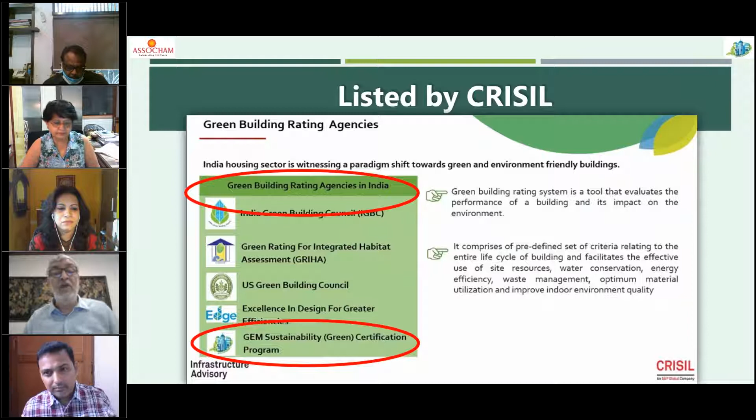Friends, we have currently certified varieties of projects, which includes Abbott as a pharmaceutical project, Hilton hotel chain, ITC chain, several universities as part of our certification program, and also large airports and railway stations.

To our certified projects, we ultimately give this nice plaque and certificate, which I am very happy that the directors and organizations are taking pride to put into their front lobbies or the director's cabin.

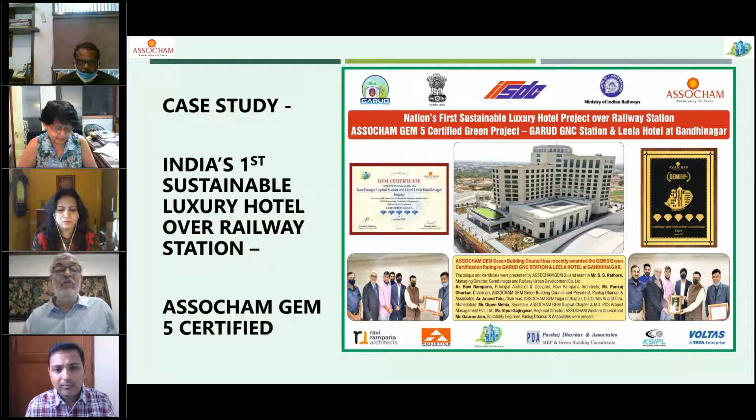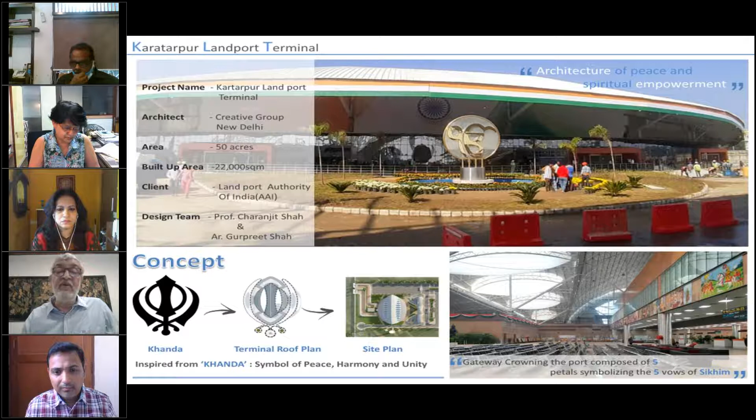Also, the very important Kartarpur Landport Terminal, which is very unique, as all of you would have known, got GEM certified. The Chennai airport got GEM certified, and also the Baroda airport. And this project in Noida, which is an IT and ITES related project, also got GEM certified.

Our main mission has been to reach you, my students, my future generation, who are extremely important to us. We know that architects and engineers who practice green and sustainability are going to really change the world, and India specifically. With that mission, we started Mission 100, and currently we have 70 plus universities and engineering colleges partnering with GEM certification.

We have now 800 plus GEM certified professionals, and today is a fascinating day for GEM because we have 1500 registrations. And friends, if you want to take real advantage of this COVID time, you definitely could, and our exam is transparent.

You can use your books and do that from home. And of course, our team is going to tell more about it, but be GEM certified and have that kind of, I would say, pride attached to your professional achievements, which will happen.

Friends, during this pandemic, we created several interesting programs, including one important mission with the Bureau of Energy Efficiency, BEE, where we are talking about how to make current buildings more green, and how to change those technologies without owners' money. This is what we are driving with the help of World Bank and Bureau of Energy Efficiency.

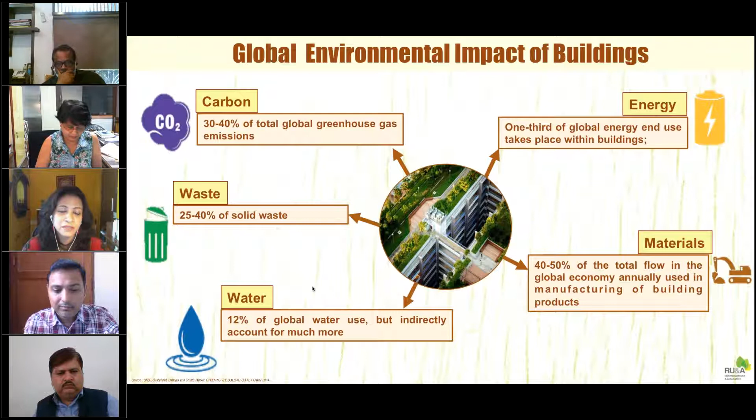When it comes to buildings, they are today the biggest emitters of carbon dioxide, mainly because of the operational energy used throughout their lifetime. Of course, energy use also goes into the embodied energy of materials. In addition, we consume about 50% of materials used throughout the entire globe, and the water consumption and waste we generate have all been recognized as issues, which is why we are focusing on how to make buildings less impactful to the environment.

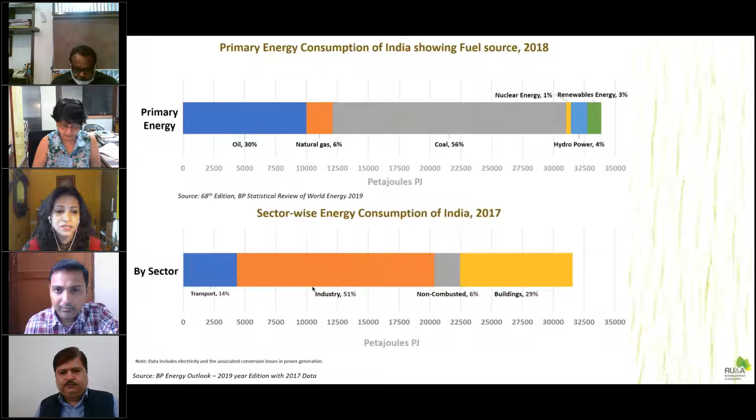Just to show you, in India alone we still use a lot of coal, which is a fossil fuel based energy that causes the emission of carbon dioxide. In the second graph below, you can see buildings contribute to 29% of this whole energy consumption. So our job is to plug the fossil fuels by reducing energy consumption, both embodied as well as operational.

When we talk about materials, we generally don't see what goes behind them. A lot of materials being used are somehow deforesting and denuding the earth, and therefore we are losing our carbon sinks, the forests, and the oceans which are our biggest carbon sinks today. Apart from the denudation, the process itself of making materials is also of concern because it takes huge amounts of energy and emits a lot of pollution.

A new thing, not so new, maybe 50 years old, is the whole concept of sick building syndrome. In the process of making our buildings comfortable and clean, we have also made them sick. In today's world, where we are talking about COVID and a pandemic like this, we do want to ensure our buildings have a good indoor environment quality. This is also one of the reasons why we look at green buildings.

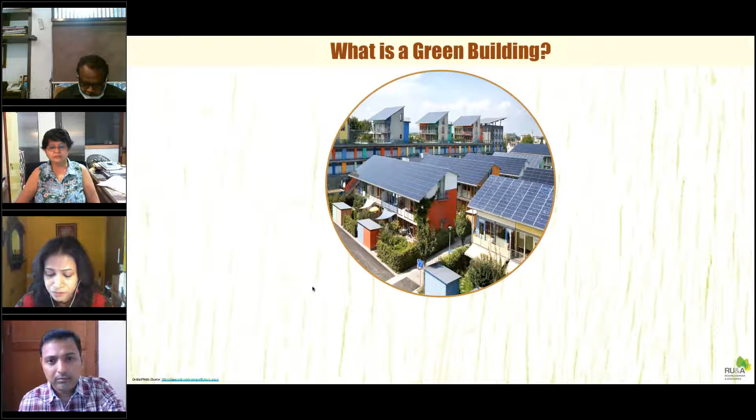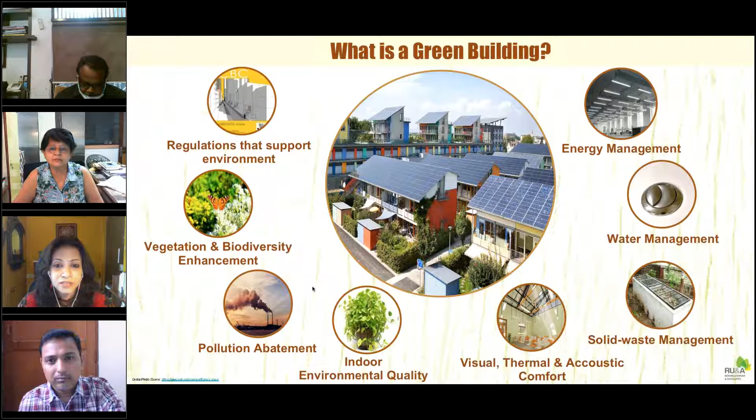To summarize green buildings, we have all these aspects: energy, water, waste, looking at the thermal, visual and acoustic comfort of occupants, providing good indoor air quality, abatement of pollution, enhancing vegetation and biodiversity, and of course following all regulations and standards. Here, fire safety standards are a very unique feature of GEM, which I would say is not considered in any other green rating systems. So it makes a hell lot of difference.

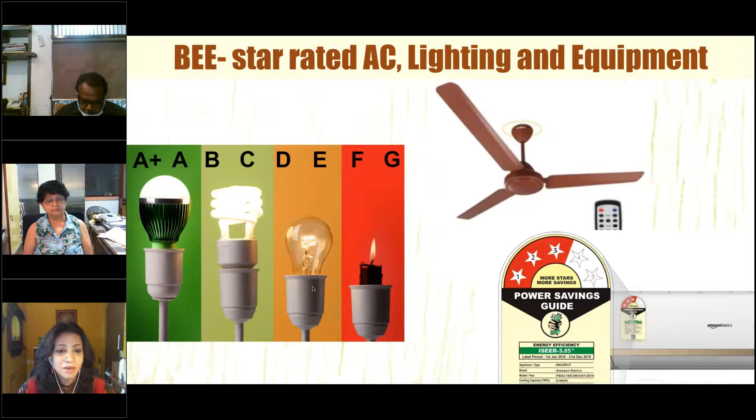In energy management, I won't go into too many details, but there are three things: passive, active, and renewable energy. Passive is the building itself, active is all the equipment, and then we have renewable energy. We have a huge body of knowledge in our passive structures in India, and from there we take inspiration for the passive aspect of the building. When it comes to active components, we have all the BEE rated appliances today, which have a potential of reducing energy consumption between 40 to 60%.

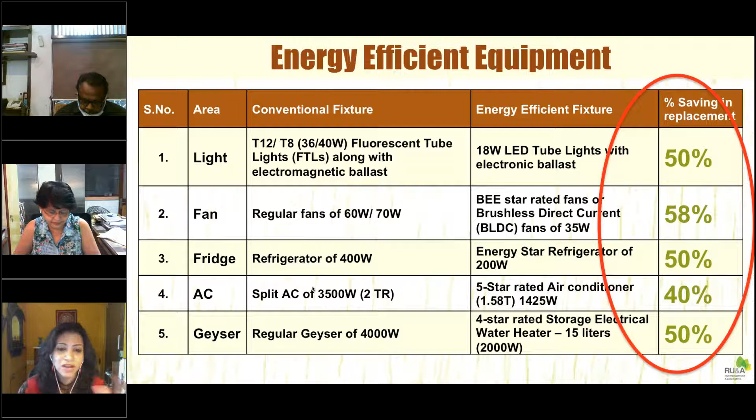So we have a huge way to reduce our energy consumption by using efficient equipment. As a country, we have potential for solar and other renewable energy, but solar has huge potential. We always think it's impossible to use solar in places like Mumbai with all the tall buildings, but here's an example of a housing society in Mumbai, 20 stories high with 4 buildings, that has been able to put about 800 kilowatt hours of solar panels on top of the building.

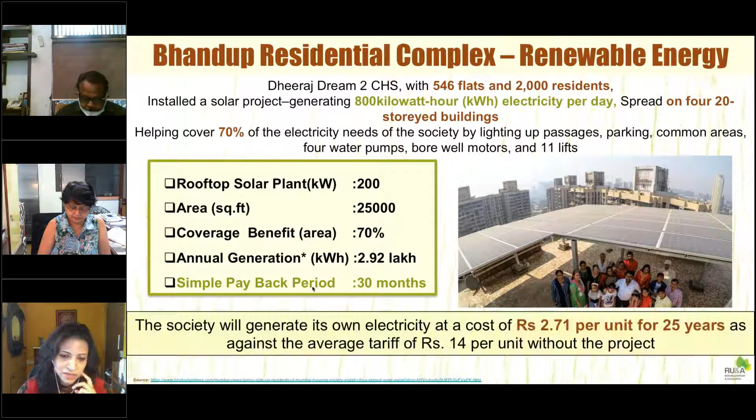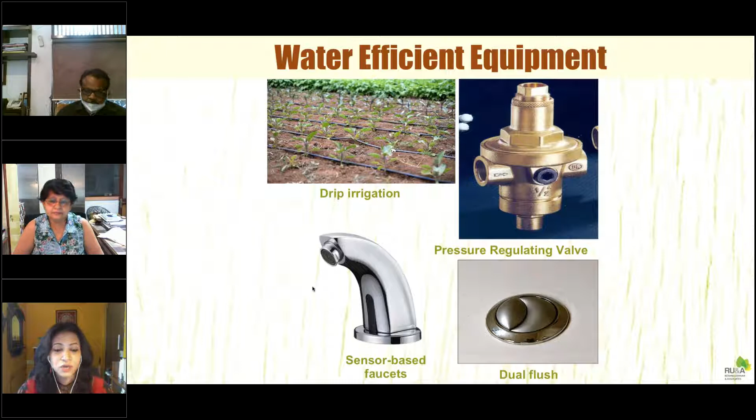When it comes to water efficiency, especially in urban areas where we're not very careful about water use, we can use drip irrigation and efficient equipment to use less water, and of course recycle water. We recently had a seminar on water where we learned that almost 90% of wastewater in Israel is recycled and used back into agriculture. These wastewater treatment plants look like gardens, but they don't use much energy, just plants to recycle water. We can do this as well.

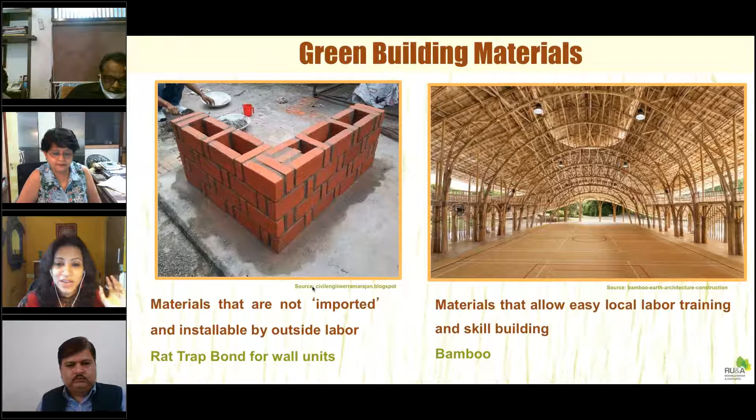For materials, we need to think of using materials which are not going to harm the environment in the long run - biodegradable, as few as possible, local materials, and so on.

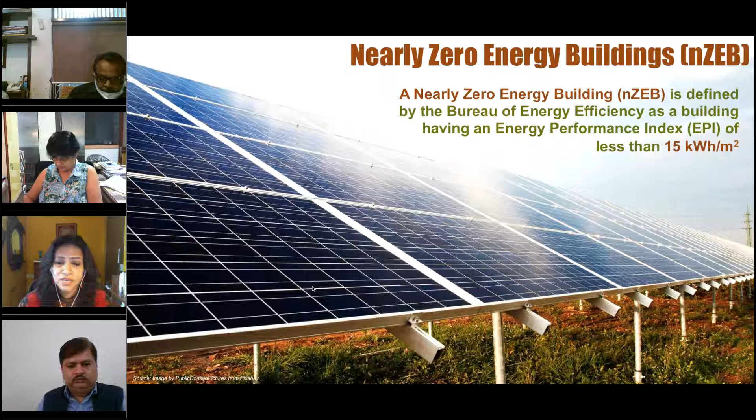The new direction we're moving towards is net zero and nearly zero, not just related to energy. The Bureau of Energy Efficiency has a definition for nearly zero energy buildings, but we're looking at net zero in almost everything - water, waste, and everything. We already have a wonderful example here in India: the Paryavaran Bhavan, which is a net zero energy positive building, giving energy back into the grid.

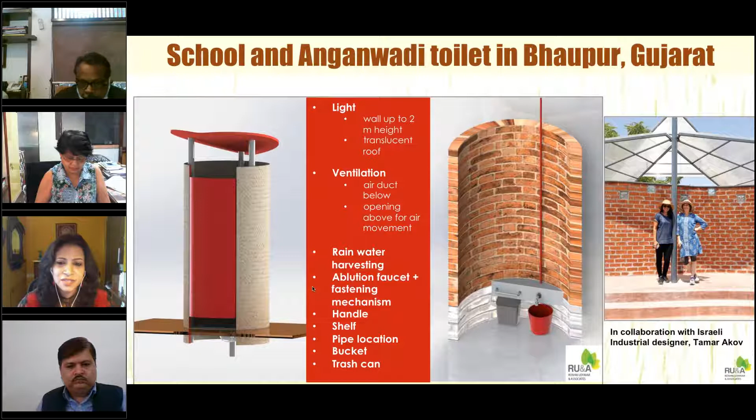I wanted to share one example of a toilet project I did with another Israeli designer, Tamar Akov, in Gujarat. The whole process was designed with children themselves - how to use the materials, what kind of shape and design - and we tried to make it as sustainable as possible.

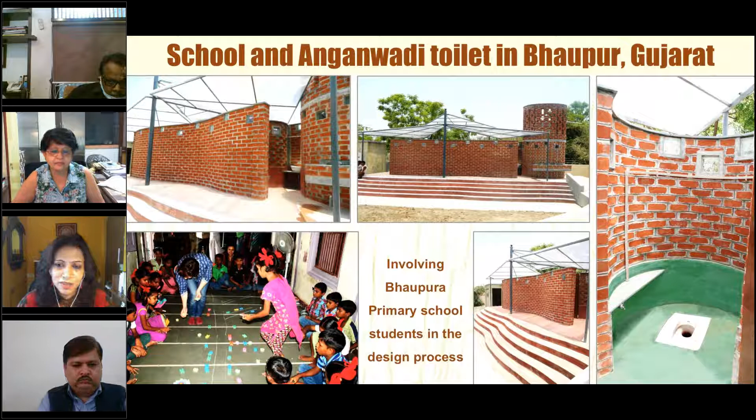Retrofitting also has great potential, and I won't take much time on this. The best example of retrofit is the Empire State Building, where among other things, they changed 6,500 windows and made it energy efficient. In the process, about 38% of the building's energy consumption was reduced.

There are examples at even larger scale, like the Masdar Eco City in Abu Dhabi, or if you look at communities, we have Freiburg, Auroville, and various other examples all over the world of communities that have gone green.

Lastly, I'd like to quote from H. Kumar Vyas's book on design: when we are designing buildings, cities and communities, we always look at design as an agent of change to enhance and improve our material, psychological, and socio-cultural environments. That's it from me. Thank you so much, and I wish you all the very best in the exams as well as in becoming a professional.

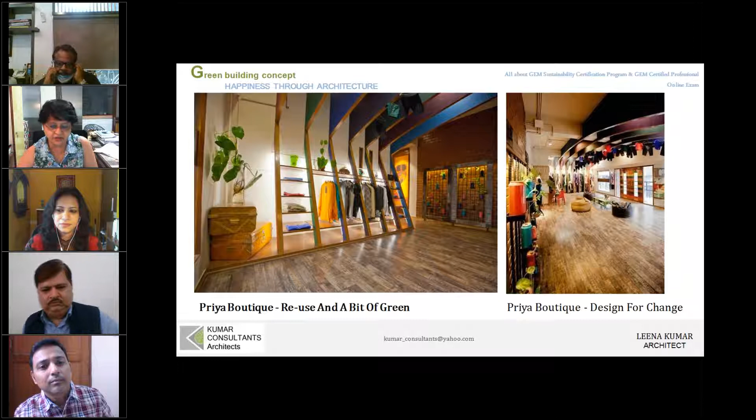A bit of reuse and a little bit of green, which is really the biophilia hypothesis, which says humans have a very innate connection to nature. And just a touch of it changes the whole impact of a space.

When we are designing, what I'm speaking of are really ideas of a green concept that are perhaps not so technical, but very important in creating an atmosphere of being positive.

This is a very small residence, which is 22 feet by 60 feet, and in the middle of it all is a skylight. When we have spaces that can be used, can be decorated, when you have reasons or occasions to celebrate, that's an important aspect of design that really goes a long way to creating positive energies.

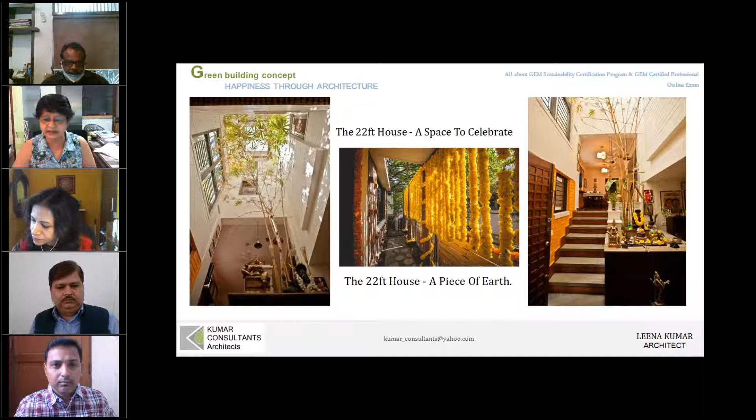It's about sunlight, it's about green, it's about spaces that lend themselves to being easily celebrated. And we as a people celebrate many occasions, many festivals, family gatherings, and that aspect of design is quite important.

This is another one which says it's about wealth and local sensibilities. Our country is very variable, we have from the rich to the poor. And when we do designs for the wealthy who can afford it, it's always a good idea to use local talent, of which we have plenty.

Because if we have 136 crore population, more than that, each one has a part to play in order to be a happy nation. Part of the whole idea of being green, part of what GEM calls a green and eco-friendly movement, is involving all of our population. Each one of us has something to contribute, and using local talent, of which we have plenty, is one aspect of it.

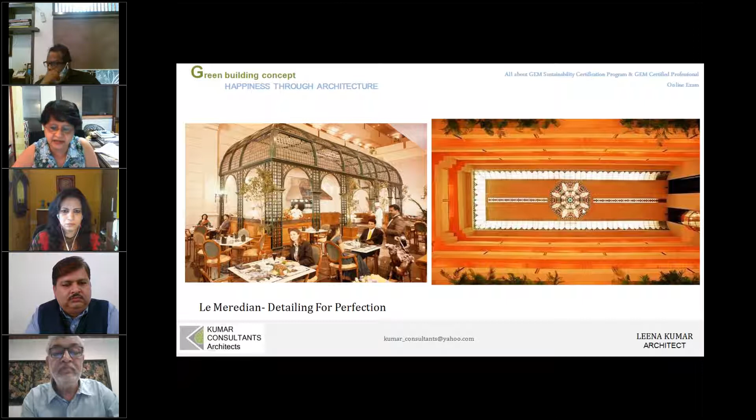Anything that we do, when there is effort into detailing, when there's an idea into creating perfection, then a lot comes from that also. These are all aspects of creating buildings and interiors that, in a way, contribute to the whole idea of a green building, because there are as many aspects to it. We have 136 crore people, and 136 crore ideas that come in, and everyone really has a part to it. So apart from the technical aspects which I'm sure you'll be going through this afternoon, I thought I wouldn't touch upon that - these are the other softer sides that go a long way into making buildings green and happy.

This is again about design, about catering to what we as a people like, what we are used to. This is an exhibition for carpets - so instead of just hanging carpets and having people see them, we created forms. We thought when anyone comes, apart from just seeing the carpet, the whole display becomes a very pleasing experience for anyone who comes and sees. It was a great success, and we had many people coming in just to see the forms, the shapes, and the carpets.

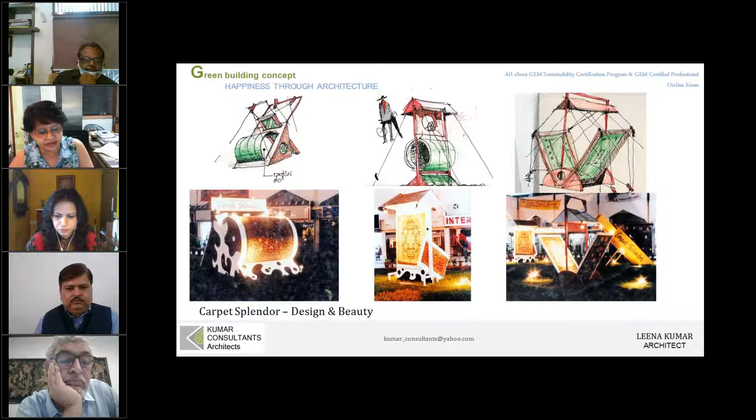When you design, even in a simple thing like a carpet exhibition, the design lends itself to the community coming together to relate to the designs that are there. That's all part of community building.

This is the last one I'll go through. This was a housing layout we had done, and the contractor had high tension wires running right through the middle of the site. Our whole design began with asking how do we make sure that after we leave the project, nothing comes up under this high tension wire, because sometimes there are commercial compulsions and people start building without much care.

So our design process began with that. We said let's design the whole clubhouse under it. We had a walking path, a jogging track, and low-rise structures with such complicated roof forms that nobody could build above that, even after we left. We said we won't have flat roofs or simple sloping roofs. Through this sense of design intervention, we ensured it doesn't go further. What we build is what it is under the high tension wire, and the site spreads beyond that.

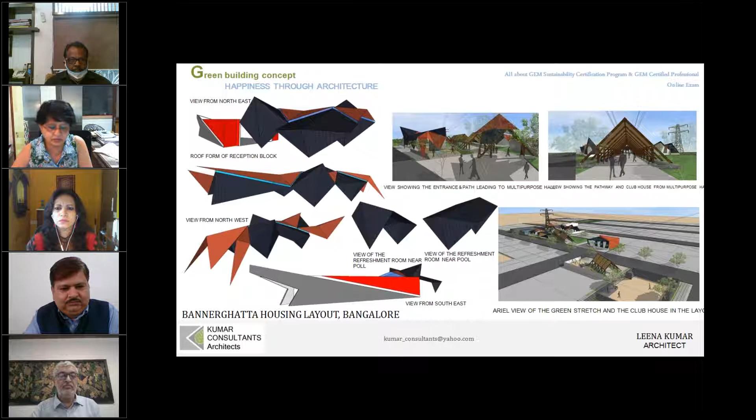And these are the forms that we came up with. Right under the high tension wire, we had a sloping roof which became our jogging track, with roofs to mitigate the effects of the high tension wire.

To conclude, I would say deliver excellence, because what goes around comes around. Excellence means whatever you do must be excellent - in terms of its quality, its design, its involvement, the materials we use, and in being sustainable. So that's it from me.

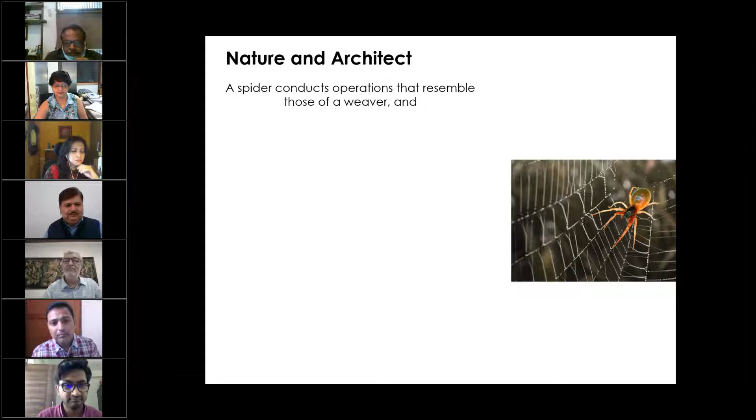Nature and architecture have a very close relationship. Karl Marx once said a spider can also combine and make its net and its cells. But what distinguishes the worst architect from the best of bees or spiders is that the architect raises his structure in imagination before he erects it in reality. So what I intend to say is that before building, we must analyze and think about what best we should build, because I believe architecture is necessarily an intervention in the natural process, and the minimum the intervention, the better the architecture.

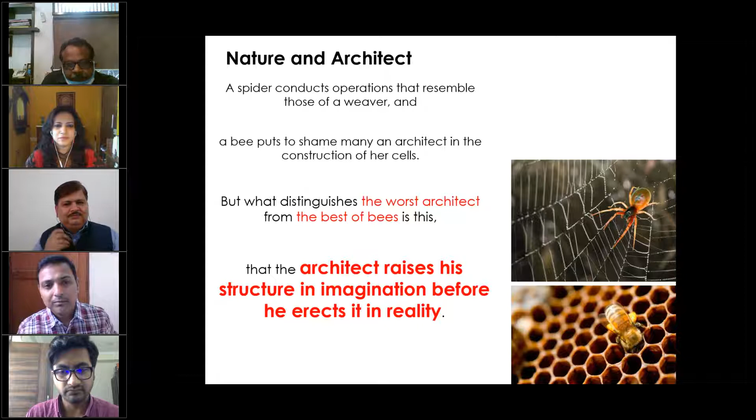Human nature and architecture are very closely related. Man, architecture, art and nature - they are very strongly connected, very well bonded.

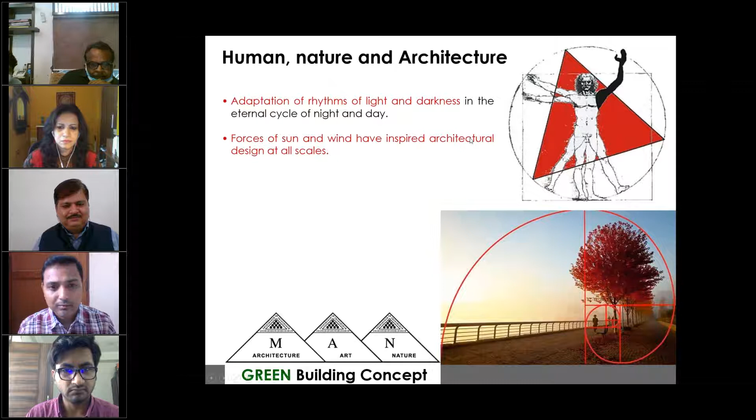When we talk about natural buildings, building nature and their sources, we have to understand the forces of sun and wind, which have been through the ages the biggest inspiration. We also need to talk about human growth, exponential growth, how we are consuming resources, and how careful we should be in our architecture. The need of the hour is to have zero energy and carbon neutral architecture - that has to be a top priority.

A true architecture is an architecture of sun and wind, how we sum passive strategies, technology systems, and ecological engineering. Architecture, the whole ultimate aim of architecture, should be to foster health and well-being. We should be very contextual, understand our own ecosystem, and let a building be part of it, with minimum intervention and a strong connection with local flavors, local ideas, topography, and site conditions.

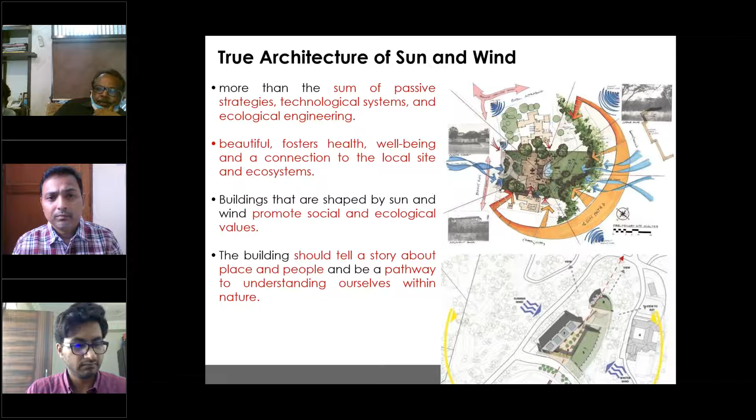It's a wonderful profession because through our buildings we can promote social and ecological values. Buildings should tell a story about the place and people. It's not something brought from elsewhere and put into our places. It should be a pathway to understanding ourselves within nature.

So in this context, I want to put forward some ideas about how architecture and bioclimatic design have been very necessary and can be well bonded.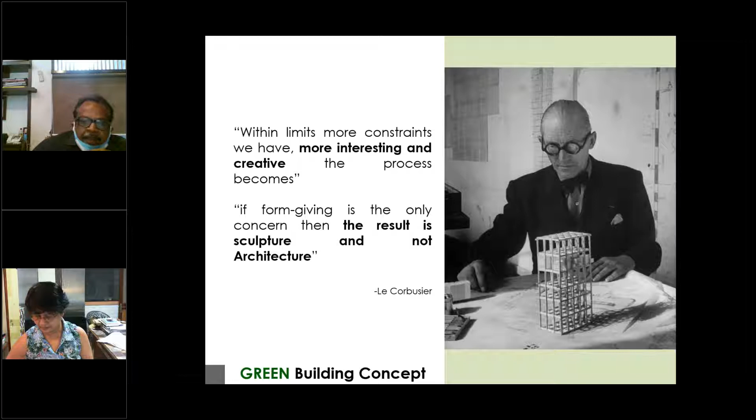What happens many times is that mainstream architects do not care about bioclimatic design, but get carried away making form, because form making is an art, and because we want to avoid constraints and have freedom. But if freedom and form giving is our only work, then we better be sculptors, we need not be architects. An architect has a lot of social commitments and has to understand social values and work them in. As Corbusier said: if form giving is the only concern, then the result is sculpture, not architecture. So we have a bigger and larger responsibility on us as members of society.

Mies van der Rohe said architecture should strive for purity, rationality, and simplicity, while Robert Venturi said less is a bore, we should have diversity, etc. These are the concepts and thinking on which the architecture civilization has moved.

But this is one of our neighboring architects - he is no more - Geoffrey Bawa. Geoffrey Bawa did wonderful green buildings, and I like his buildings because he always advocated that architecture, or a building, is a living component.

Just think, a building is a life component. It breathes, it reacts to sun, it reacts to wind like a shelter, it reacts to water and rain. Like in winter we need to put on extra clothes, a building has to change as per climate change and weather conditions. So never think a building is not alive, don't think it's a dead mass, and your whole thinking towards buildings will change.

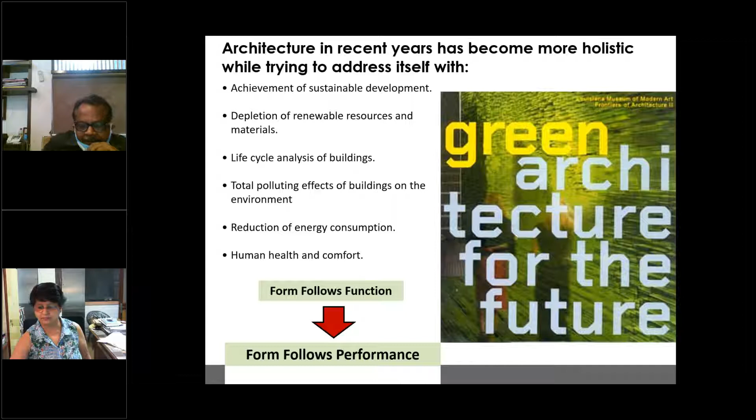We are India, and Indian values and Indian thinking are always guided by Mahatma Gandhi, who fought for the freedom of India. Mahatma Gandhi always taught us five or six things: truth, simple living, self-sufficiency, peace and non-violence, passive resistance, and environmentalism. So I think...

These are values we can practice in architecture too. If we base our architecture on Gandhi's values, when he talked about Sarvodaya, progress for all, I think our buildings will be simple, nature-friendly, and will slowly improve our standard of living, and will be very contextual to our architecture practices. So basically the aim of green building is to minimize resources and maximize the reuse, recycling, and utilization of renewable resources.

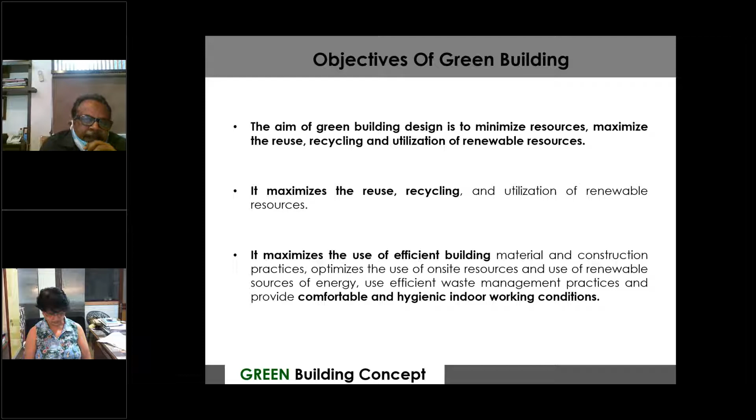Green building maximizes reuse, recycling, and efficient use of buildings. Comfort and hygienic indoor working conditions are always a top priority. Green building is a necessity, not a luxury. It must be followed if we want a happier world and continued happy living conditions. So basically green building means five things: structure design efficiency, energy efficiency, water efficiency, material efficiency, and waste and toxic reduction.

So my thought is we should be building something which is contextual, sustainable, and affordable. We have so much housing need, so many urban poor and rural poor, and we are also a disaster-prone, natural disaster-prone society. We have a huge housing demand, and we should be very sensible in doing our housing programs. We should relate to the site, be sustainable so our climate is not damaged, and be affordable.

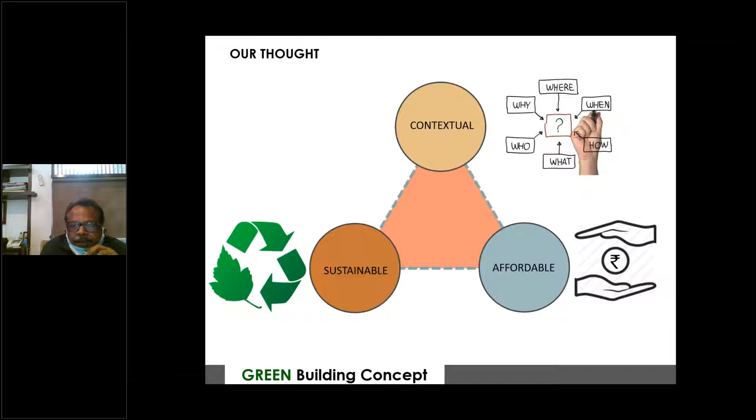We should put a lot of thinking and brainstorming into why, where, when, and what to do before we start a work. Architecture is a process of continued knowledge developing. You have to initiate, prepare, make proposals, evaluate, and take action—this is a recycling concept. So it is reiterating, and the more we do this exercise, the better finished product we come up with.

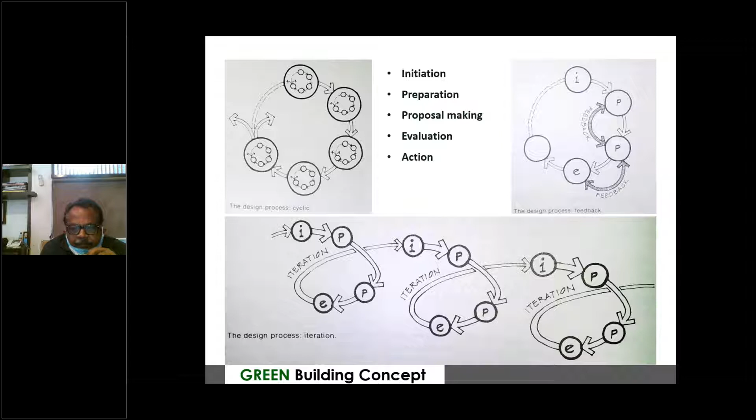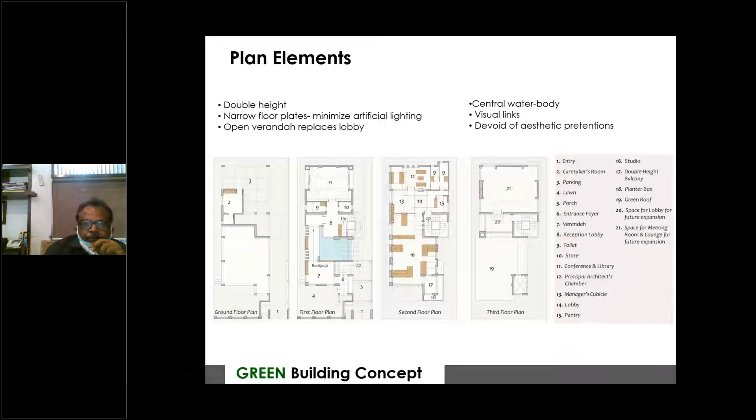This is my own design studio, which happens to be the first 5-star rated green building in Odisha. It's a small plot about 40 by 70 feet, with 3-4 different levels. Fortunately, we have open space on the north and south, and more dead walls on the east and west, which gives ventilation, and on the west side we have vertical greening. These are the building design features—we try to follow more lighting, more ventilation, front louvers, etc., and surface to volume ratio.

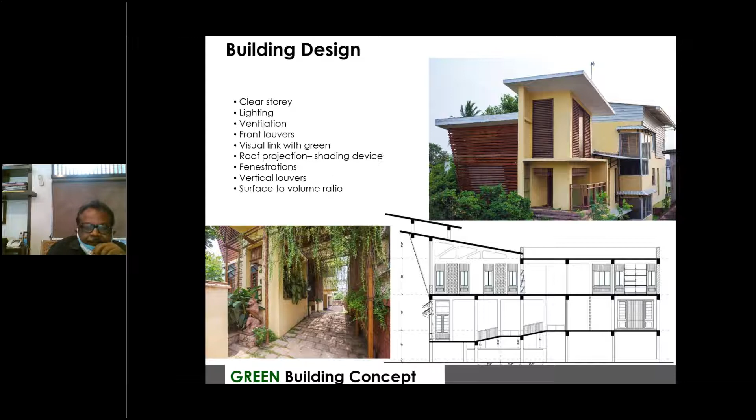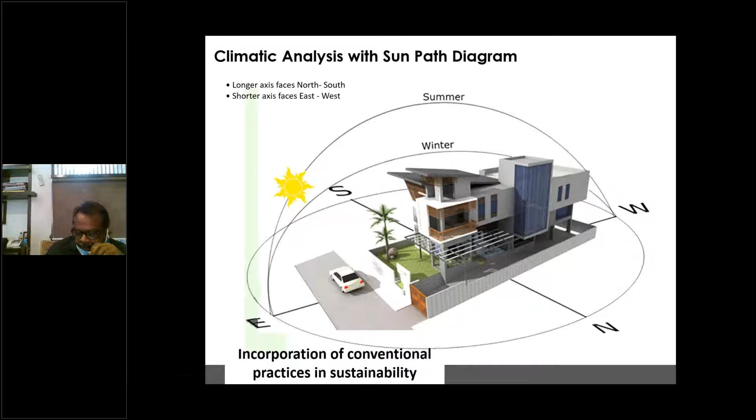First we did a climatic analysis. We had a longer axis facing north and south, and a shorter axis east and west. These are very basic principles, but if we follow basics, we come up with a wonderful result. This is the cross-sectional view—if you can, let's go to the pictures.

So the building is around a central water body, which cools the whole thing. And we try to promote a lot of local art.

I live in the old town of Odisha, which has the famous Lingaraja temple, Mukteswar temple, and Bindusagar water tank. It's a space for arts, culture, thinking, and Odishan history and architecture is all around. We thought we should have a modern building which resonates with the cultural history we have—can we not have heritage interpretations in a contemporary style?

So the entrance is through a green canopy. We don't have a formal reception—we have a veranda, as an Odia house always has a veranda, and then we go up to the office, where local craft and local art are given features.

This part of Odisha has a 480 kilometer coastal stretch, and from here, looking into the whole southeast region—right from Thailand, Indonesia, and the Philippines—we have a strong sense of architecture that uses natural materials. So why not get more Asian in our thinking than European, as we normally do, because we have a tropical, warm and humid climate.

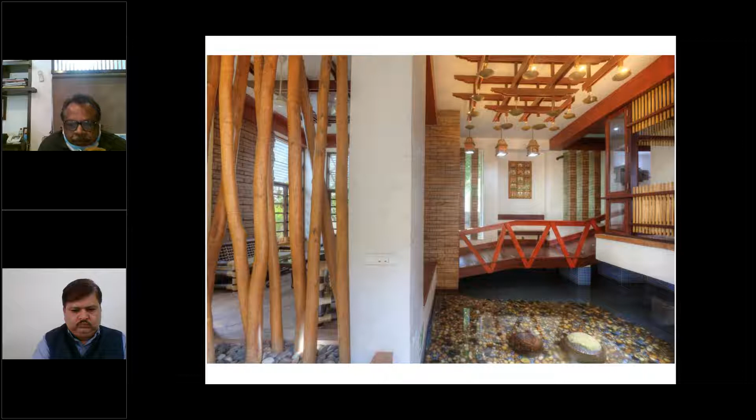So these are the local thinkings, local lamps, local traditions, local history, which is incorporated. If you see the entrance, this is the sort of woodwork used for formwork and shuttering—we thought that waste wood could be reutilized here. The building has a sense of proportions and traditional features which can be rationalized to modern use, giving it a contemporary feeling.

This is our conference room—the roofing has Navgraha paintings and a lot of lion motifs there. We strongly believe knowledge is power. If you want to rule the world, we should have more and more knowledge within us.

This is the entrance foyer, which speaks of historic and cultural imprints. We have a Vastu Mandala on top. The sculptures draw inspiration from the nearby Mukteswar temples, and on the entrance door we have paintings of the Dasavatar. Our traditional art has been very rich and very proportionate, and these elements can always find a place in contemporary buildings.

These are the design studios which get north and south light, and the west side is blocked with good ventilators.

This is my chamber where we have a Mukteswar temple replica, and they draw a lot of natural light. The south side, the west side, is blocked with a vertical green wall. So we try to do a lot of local flora and fauna, aquatic plants which are very local. The green site and landscape is a very important issue in architecture.

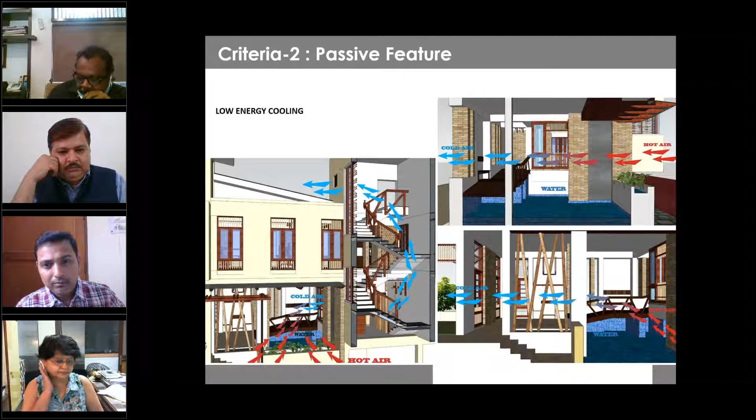Creating low energy cooling using water. Traditionally all our buildings used to use water, even in Mughal buildings. So we can take this for circulation, taking hot air through clerestory and putting cool air inside, ventilating them makes the building very cool inside. And we can have green wall, green pergola, green roof, and solar features. These are the natural features which we try to use.

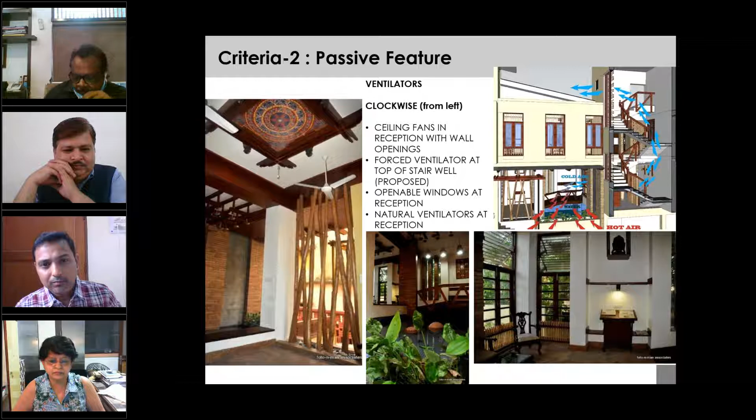And the ventilating, if you can see the window treatments, we have ventilators, slope ventilators, so hot air goes off like that, so we don't have to do this. And we try to create a little tropical architecture style which has a lot of verandas, etc. And the sanitation, one has to be very careful, creating environments which we learn from our own experiences.

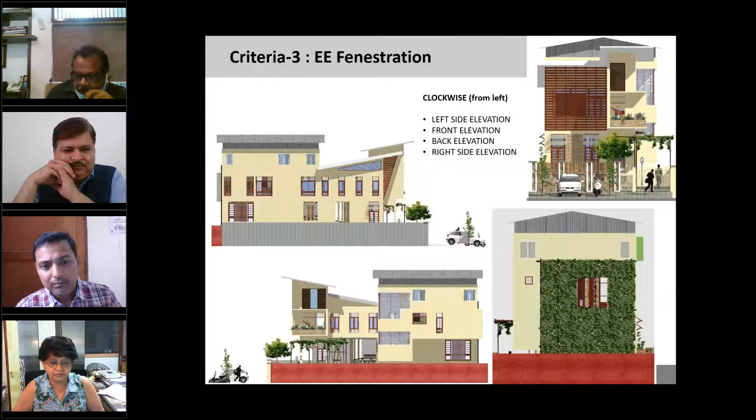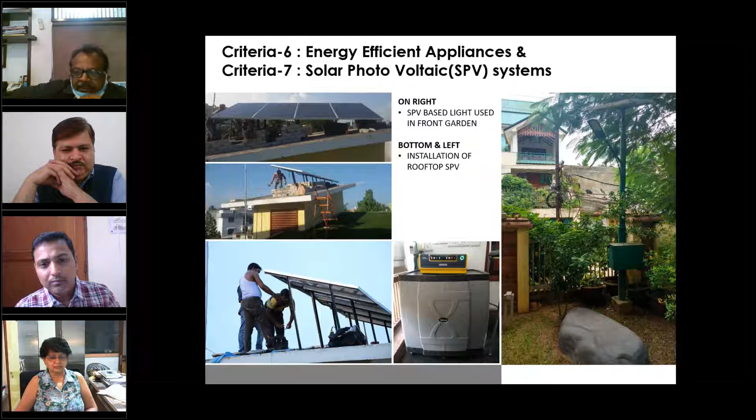So these are the window features which I have tried there, and various types of fenestration which help cool the house, keeps it very cool. Bhubaneswar sometimes gets 45, 46 degree temperatures and becomes the hottest city of the country, at least for a week. So, of course, energy efficient appliances help you out, making it more green and less dependent on other energy sources. Your natural sources become very useful.

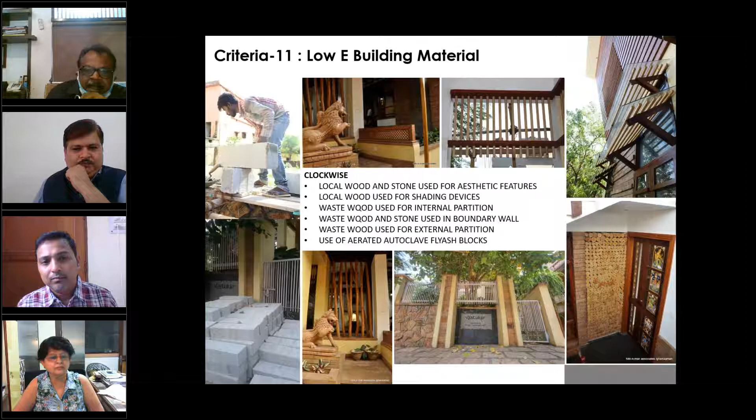Local wood and local stone, local work is a necessity. Using waste wood helps you and makes your building feel good, and you belong to this. It talks about your origin, talks about your culture, talks about your art. The building represents and becomes a symbol of your art. This is how we built our sculptures using waste stone, etc.

Not only the building, your lifestyle has to be green. So we try to use a lot of, if you see these chandeliers, they used to be traditional dowry boxes. And your fenestrations, the jali, the stone sculptures, this also engages a lot of local craftsmen and creates work opportunities for them.

So I now move to the second project.

Before I move to the second project, I want to give a small introduction. When Laurie Baker came to India after his architecture degree from Europe, he came across Mahatma Gandhi and asked Gandhiji that, sir, if we have to do a small Indian village, what do we do? Gandhiji told him, please be sure that you do not draw any material, do not draw a mason, do not take a worker more than 3 kilometers from your site. So Laurie Baker then thought that maybe Mahatma Gandhi is a politician, so he is having high ideas, not implementable. At the age of 90, when Laurie Baker passed away, he said, it took my whole life to understand how true Mahatma Gandhi was.

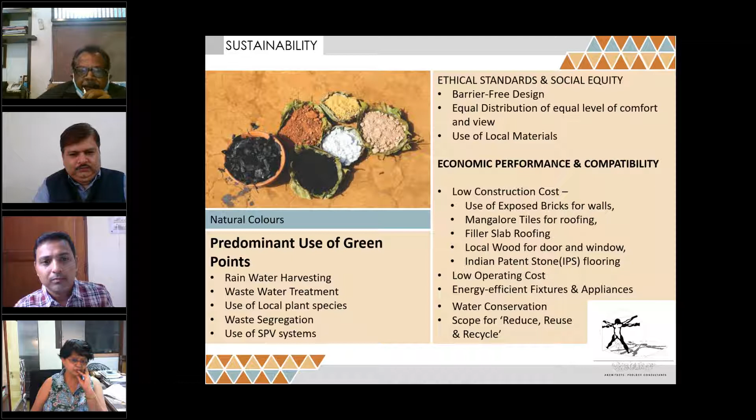So architecture is a very passionate practice. If you want to do good buildings and create a good environment, you have to be very passionate about it. So the next building we try to do, you have to have your ethical standards, social equity, and use of green materials, economic performance. On the left, the sketch, the Odisha tribals use these color pigments from natural resources to paint their buildings.

So this is the next building. I'm talking about a school building we did, a KISS, Kalinga Institute of Social Sciences, which gives free education to tribal children. This is in Baripada. So before we built that, we studied the Santal houses. There are a lot of Santal proportions, a lot of geometric and colorful patterns. They use certain nature pigment-driven colors.

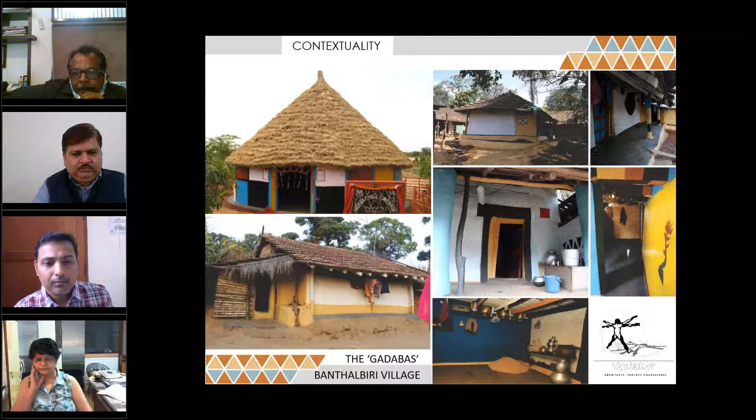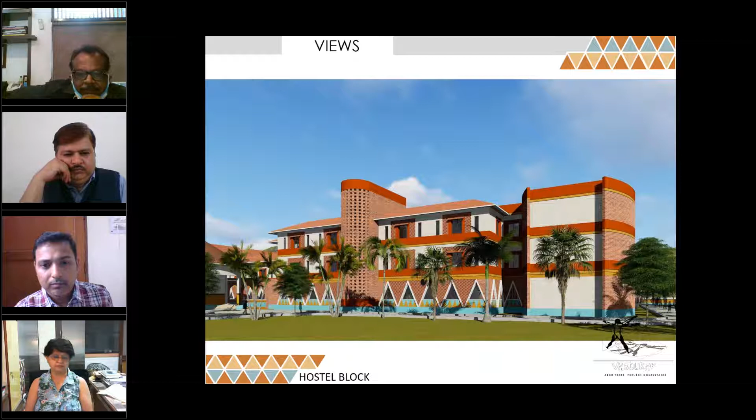So we went and studied there, and these show how people build all around our site. So when we designed this modern building, we thought it should take inspiration, that we should be very local in our thinking. The campus contains a school building, a hospital, a dispensary, hostels, staff quarters, etc. It's about a 10-acre campus. We tried to draw our inspiration from the tribal architecture close by, taking the triangle as a symbolism which Gadaba houses use, trying to create a modern building which is contextual. These hostel buildings use simple brick jalis and the same triangular patterns.

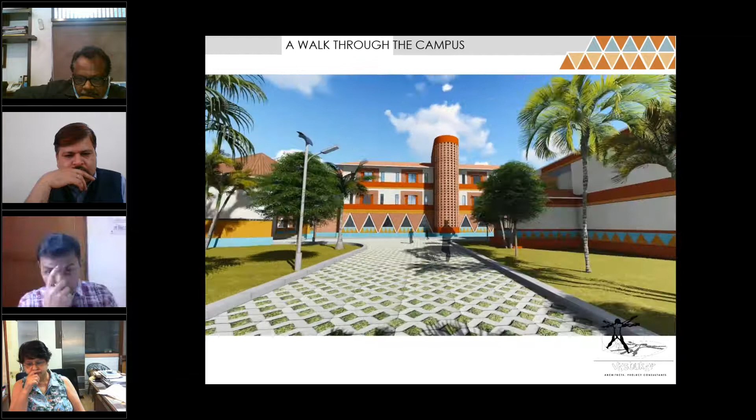So I want to conclude my presentation: first, green building is a necessity, and in architecture, one has to be very passionate about doing this if you want to create a better environment. Excellence is not a skill, it's an attitude, and green has to be a way of life. Thank you very much for giving me this opportunity to speak.

Thank you, Reza. Thank you. It really was a wonderful presentation. And what I can pick from your presentation, Leena ji also focused on this, and you are also focusing on using local traditional art and local artisans in your projects.

We are also discussing in our GEM Council that we should focus on giving points and credits to projects that use local art, traditional art, and local artisans, because this will help local artisans improve and survive. As we give points for local materials, we should give points for using local artisans and traditional art too. So it's really wonderful that you are going for sustainability using traditional artwork and traditional things.

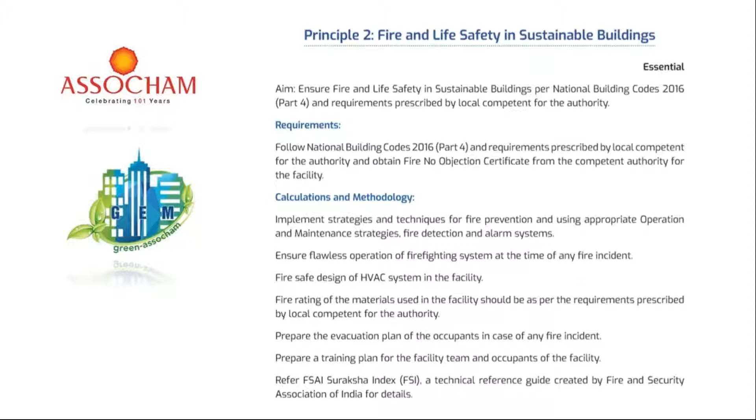Principle 2 is the same way: fire and life safety in sustainable buildings. National Building Code 2016 Part 4, on the requirements prescribed by the local competent authorities. Obtain a fire no-objection certificate from the competent authority for the facility and submit it to us as required. These reference guides are available on our website for free - you can just download and read them. Right now I am not going through all the principles one by one because there are 30 of them, and you may get exhausted. It generally takes a 1 to 2 day workshop.

We used to take workshops before this pandemic. So right now in 1-2 hours, we might not be able to cover all the principles. So I am just giving you examples of how to interpret these principles.

For example, principle 6, landscape best practices, core points. Minimum landscape area requirements for residential projects, at least 15% of site area. Let's say you have a building on 100 acres, out of which 15% will be 15 acres.

If 15 acres of that site area is kept for landscape, you'll get 2 points. If you say you cannot give 15 acres, maximum you can give is 10 acres, then you'll get 1 point. That is for residential projects. For industrial institutions, there is a different requirement of 12 and 16; commercial and other projects, 10 and 15.

This covers the landscape area on the mother earth only. It's not that you'll put a pot and grow some plants, not like that. It is about landscape area on the soil, inside your site area. And you should plant native, adaptive, and drought tolerant flora on site for at least 35% of the total landscape area. It is essential.

Now, inside the principle, there are also essentials. We have a total of 4 points. Let's say you're doing a residential project on 100 acres site area, and you allocate 15 acres for landscape, you get 2 points. Apart from that, if you want another 2 points, what is the criteria? At least 55% you have to do.

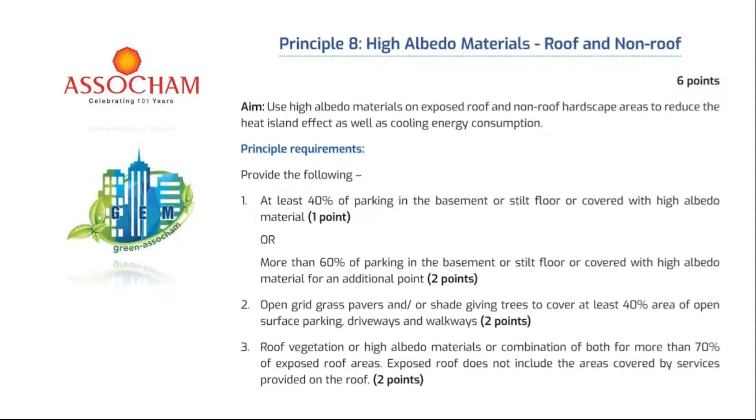We can advocate on this. Just 6 points you will get for doing this - out of 130 points, 6 points for Principle 8. Easy, right? Like that - rainwater harvesting, recharge or reuse. What is recharge and reuse? The rainwater harvesting system is not unknown to most of us right now.

Maybe a decade or two decades before we didn't know this, but right now storing rainwater for landscaping, flushing, or domestic applications as applicable is not a new thing for many. And if any competent government authority says the groundwater table is high - this question comes up many times, so we completely addressed it in the reference guide itself - if your groundwater is high, you cannot just keep the rainwater and discharge it back into the soil because the groundwater table is already high.

It's not required. Then the project shall provide a storage system to cater to rainwater from the roof surfaces only. If the groundwater level is less, then you can take roof, non-roof, everything - we can collect it, reuse it, recharge the ground itself. But if the groundwater is high, that is a different point of view, a different perspective. That calculation will be done differently.

Quality of rainwater should meet the standards. Now when we are reusing or recharging this rainwater, this quality cannot be compromised. It's not that we collect rainwater somewhere that has somehow mixed with oil, and we just use it back into the soil - not like that. The quality has to be properly treated and recharged into the earth. For this percentage, 30% is essential, 60% gets you 2 points, 90% gets you 4 points. Easy. Let's move on to Principle 10, install low flow water fixtures.

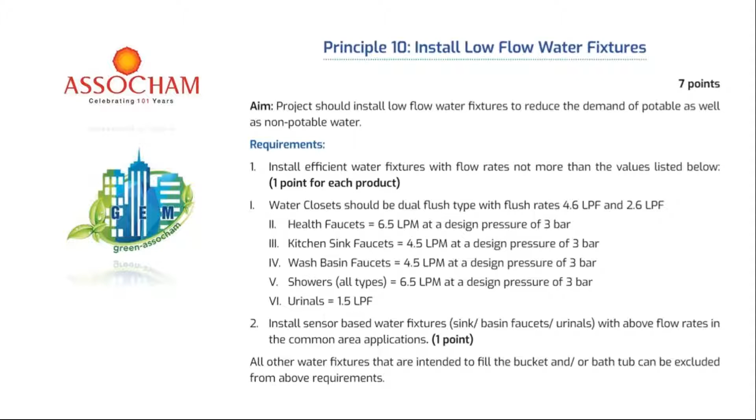So GEM is designed - every time I'm making a principle, I'm talking about why GEM is introduced. GEM is designed in such a way that it is completely applicable. It's not frustrating. It's not that we are making some kind of design or parameters which is frustrating in nature or not practical. Okay, all these things are practical.

You can see on-site treatment of gray and black water and reuse for flushing. So we are saying reuse for flushing - not for landscape or anything - because a lot of people have apprehensions about reusing flush water for flushing and on-site treatment of gray and black water. Gray and black water - what is gray and black water? First of all, when you go to the toilet, right, that water, the flushing water, that can be treated. If you treat it on-site with CPCB or SPCB standards, you get 2 points for that.

Dual plumbing in all toilets for flushing in all tenant spaces - inner plumbing fixtures itself, if it is doable, only if you think in the conceptual design phase, then the MEP consultant can make this kind of design where they'll create dual plumbing fixtures. One side will come from this flushing water, from the on-site treatment plant.

Use treated water for flushing such that at least 75% of total flushing water demand is fulfilled by the treated water, or if more than 95% of total flushing water demand shall be fulfilled by treated water. So different kinds of applications, different ways - we are just mentioning some quantifications, 75% or 95%, but the main intent is that we are trying to reuse the gray and black water for flushing, and trying to make the gray and black water on-site treatment happen.

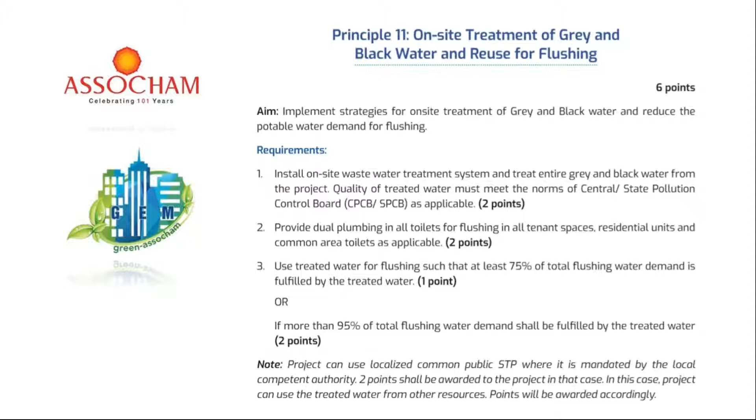Projects can use localized common public STP. If there is a common public STP, sometimes the bylaws say you have a localized common public STP for a lot of buildings out there. You can use that, no problem - 2 points will be added to the project in that case. Not a problem there, because the government itself is giving that provision. But you should have the kind of fixtures that can take that water back into your flushing system.

Post occupancy waste management, principle 4 points. I'm not going through all the principles - right now I'm going to principle 14, post occupancy waste management. What is post occupancy waste management? When you're talking about waste, one type of waste is generated when you're constructing things, right?

Constructing the buildings, and once people live there, that is called post-occupancy waste management. Provide separate waste bins for biodegradable and non-biodegradable waste at each residential unit, tenant, or floor level, as applicable.

So if you talk about the 5 elements of nature, what element are you trying to conserve or preserve here? What are we generally doing? Waste management comes into which category?

Mostly it is a kind of quantification of the soil element. Everything can be related to some element. So waste is there, some waste material is there - how can you use it? We don't want those things going to the landfill. Landfills exist in every city, and for God knows how many years these things sit there and smell, giving a lot of disturbance to the localities and the planet as well. So we are trying to minimize that.

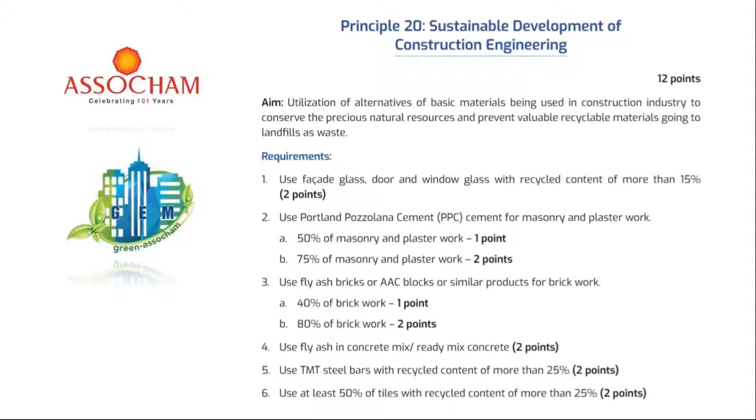Use at least 50% of tiles with recycled content of more than 25%, for 2 points. So total there are 12 points in this principle - out of 135 points, you can get 12 points in this principle alone.

Local sourcing of construction material - this is what Mr. Ray was showing in the presentations. He was referring to Mahatma Gandhi, talking about the 3-kilometer radius - if you can do something like that, then make a village.

Utilize locally available building construction material manufacturers/suppliers for buying materials to reduce environment pollution and transportation cost. Here we are trying to find local materials, regional materials. Why? Because if you do it locally, the local industries will prosper - number one. Number two, our reliance - we will be reliant on our local industries, nearby places. Embedded energy will be less.

Embedded energy means the transportation cost. The carbon dioxide footprint if you bring something from Andhra Pradesh to Karnataka versus doing something inside Karnataka itself is a different thing. So locally sourced sand, stones, aggregates, bricks, paver blocks, concrete, whatever is applicable.

If you can get it within 250 kilometers, 2 points - generally all projects do this, most projects can do this. This is doable. We are trying to make a movement around it, not trying to do something that is always very stringent. You don't have to be stringent always, you just have to make it part of your intent. That's why we call it GEM - green and eco-friendly movement.

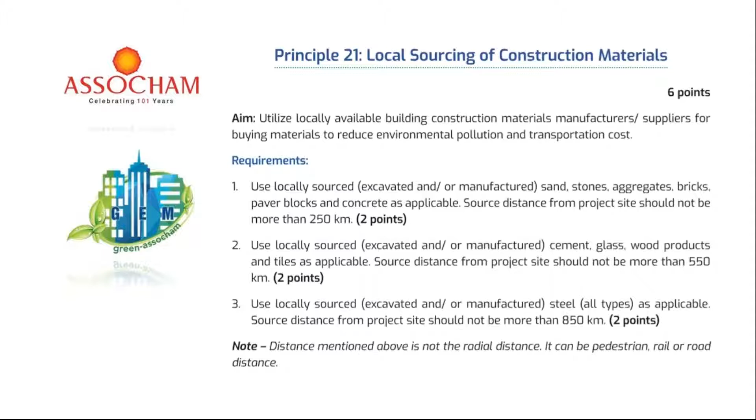This is an indirect contribution. Sustainability of the building is happening by using all this. Of course embedded energy is reducing, carbon dioxide footprint is getting better. But apart from that, we are also strengthening the economy. That's why in the triple bottom line, in the very beginning, I said there is a factor called economy - we cannot go away from economy and our social responsibility just for doing something sustainable. We have to get everything hand in hand.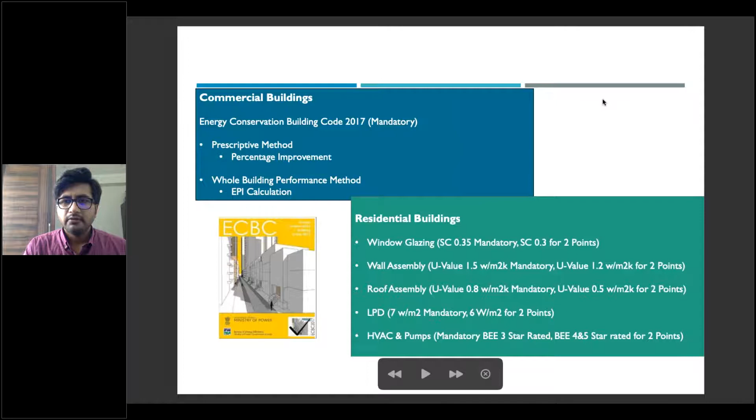When you compare your EPI with the baseline EPI—the baseline EPI is what your energy code suggests. The energy code says the EPI value should be this, and if you follow...

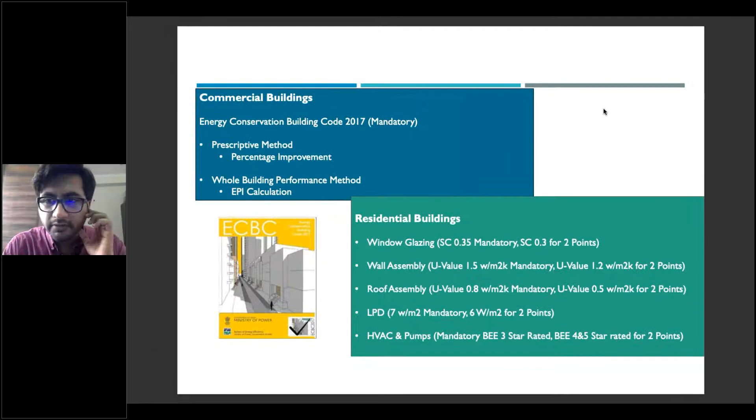Kishan, are you there? Sorry. Yeah, yes, sorry, you can switch off your video. Okay, audio quality will improve. All right, all right. Just a minute, sir. Okay.

So here we can see that EPI ratio is basically the performance of your building compared with the baseline building. Similarly to how we calculate the EPI of your building, we can create a virtual building considering the parameters given in the book for the baseline model. So you can compare your building's energy consumption, which should be very less or should be less than the energy consumption of your baseline building.

This is the concept: your energy consumption should be less than the baseline model's energy consumption. Now, what if I have a residential building? If I have a residential building, I cannot follow the ECBC because ECBC is for commercial buildings.

For residential buildings, GEM itself has created some baseline parameters. If you look at the glazing parameter, a shading coefficient is given, and if you improve the shading coefficient of the glass, you will get 2 points.

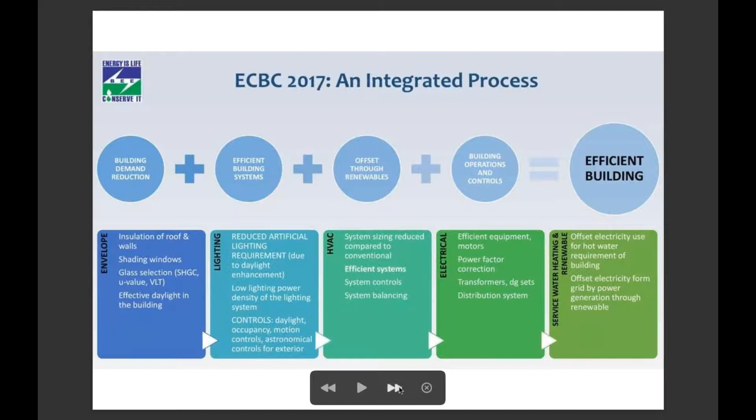Coming to next, is about the transformer. The transformer efficiency is checked at 50% load, 100% load, and no load. At these 3 stages, you can check how much losses are there, and you can compare these losses with the ECBC guideline to see how good and efficient your transformer is.

Similarly for the motors, we should go ahead with IE2, IE3, or IE4 efficiency - the higher the IE value, the more efficient the system is. Similarly, 3-star, 4-star, or 5-star rated motors can be selected under the GEM rating system.

Install on-site solar photovoltaic system based on whatever your contract demand is. If you provide solar photovoltaic of 5% of your contract demand - let's say your demand is 100 kVA and you provide 5 kilowatt of solar photovoltaic - you can comply with some points. Similarly, if you increase the capacity of solar photovoltaic up to 25%, you get much more points. If you do not have space on your site, you can install it somewhere else near the site and still get points, but in that case you have to install a bit higher capacity - minimum 10% and highest 30%. Accordingly, you will get points under the GEM rating system.

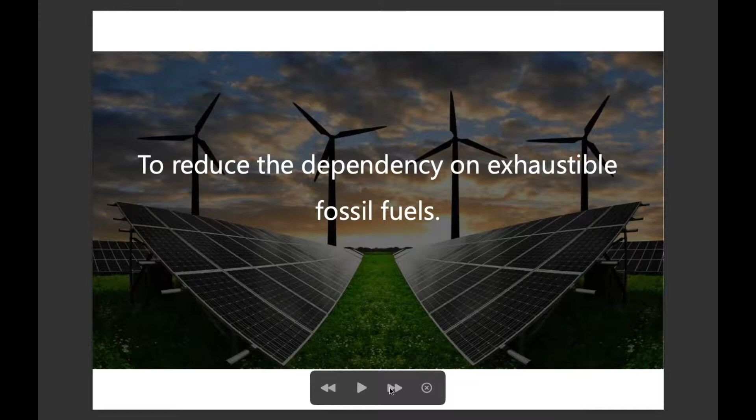So to reduce the dependency on exhaustible fossil fuel, this solar system should be used. Coming to natural light, that's a visual comfort. When the natural light is there, definitely our efficiency of productivity always increases. But only the human productivity is not the only concern, but energy is also the concern.

This will help you to identify how much area is daylit. And if you comply with the ECBC requirement, that is 40%, you will get the compliance of ECBC and GEM rating. If you are increasing the daylit area, you will get 2 more points, and additionally, the points will be rewarded.

So when natural light is available in the space, then artificial light can be switched off. It saves a lot of energy consumption. Sensors can play a very vital role.

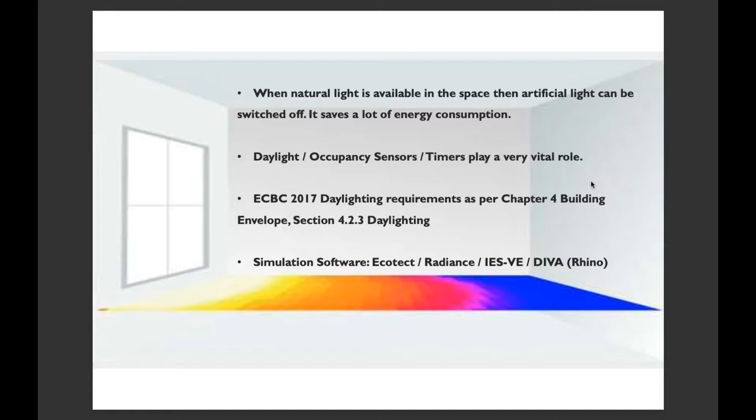What about air quality? You must be knowing that Chandigarh you will find a very good place. But again, in Chandigarh also, we have this record that has come up that the PM 2.5 level itself is increasing - 572 in daytime, 360 in nighttime, which should not be more than 60 value. Now you can see how the air quality is getting bad.

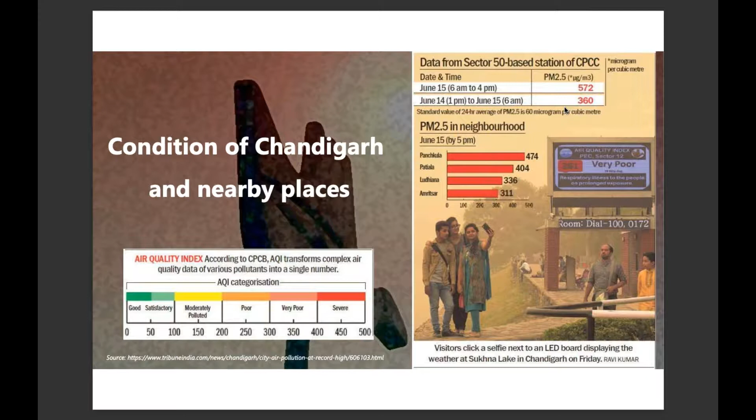So to control that, what we need to do is we need to provide very fresh air, some good air. Now, when you are sitting in a closed room and you do not have fresh air, after some time you will feel suffocated because carbon dioxide is being ejected, and if that carbon dioxide concentration is increased, you will feel suffocated.

To control that, you need to provide some fresh air from outside with filters. The filter is called MERV filter, MERV - this you may get in the examination. Minimum Efficiency Reporting Value, that is MERV. So MERV value 8 is the minimum required, which will filter the fresh air and inject the air inside your room. So some quantity is required.

The question can come that if I'm injecting more fresh air, that means my energy consumption should be very high. And if I'm putting very less fresh air, I may get suffocated. So ASHRAE 62.1 has come into picture. ASHRAE 62.1 says about fresh air quantity according to person, according to square feet area, and accordingly you can identify the minimum quantity of fresh air required, in a balanced way.

And you can inject this fresh air. Similarly, you can provide CO2 monitoring. This CO2 monitoring system can be there to check whether your ppm level, the CO2 level, is increasing or decreasing, and if you are providing a bit more fresh air, you will get more points.

This is what basically a sustainable building - a sustainable building has some effect. CO2 emissions you will reduce around 35%, this could be plus minus. In some buildings the value would be less, in some buildings the value would be a bit high, but averagely we can say water saving can be 40%, energy use can be 50%, solid waste can be 70%.

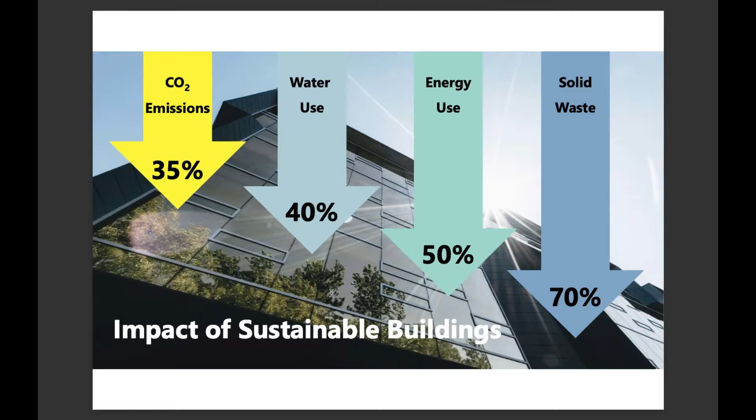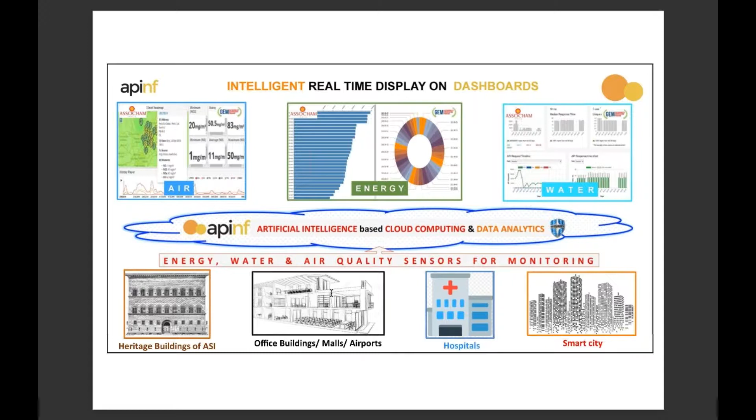This is how a green building, a GEM rating building, can be giving advantage to any owner of the building. This is the intelligent real-time display on dashboard. ASSOCHAM has created such kind of artificial intelligence-based cloud computing analysis. You can check and see, you can feed the data from your energy meters, and you can identify how the building is performing.

This is the kind of tool you can check with the help of ASSOCHAM, and these apps which I've created particularly for the green rating system. You can opt voluntarily. It is not mandatory, but you can opt and identify, monitor your buildings very efficiently.

So this was all about the GEM, about the three parts: one is visual comfort, thermal comfort, and the fresh air quality.

So this is a very good strategy, because for other owners, if you are consulting any of them and your name is visible, other participants or other developers can identify the name and they can contact you.